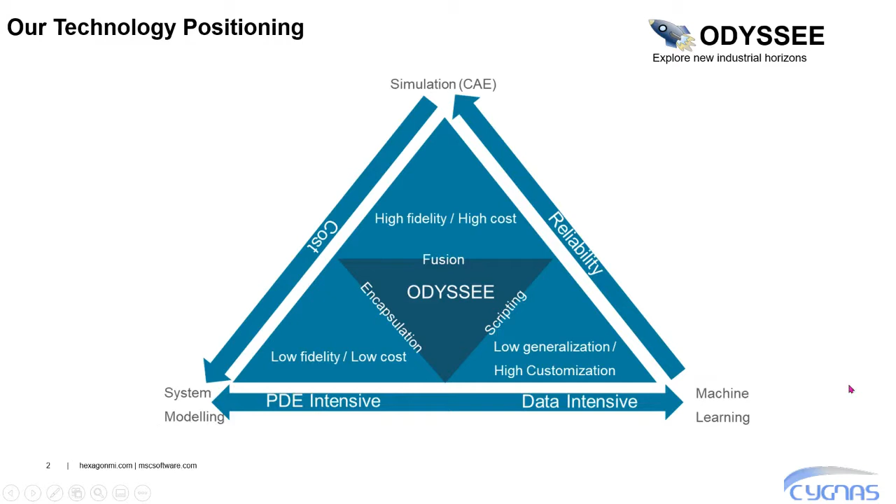Now, this is very much traditionally based on scripting, and it has small generalization, and scripting means customization. But what we want to do with ODYSSEE is to somehow simplify this aspect, that you don't need so much scripting, Python, etc. But you can have an engineering tool which you can work with your data, with your simulation models, and of course you can encapsulate everything you do in your system model. So via these techniques, we will encapsulate simulation models in system models.

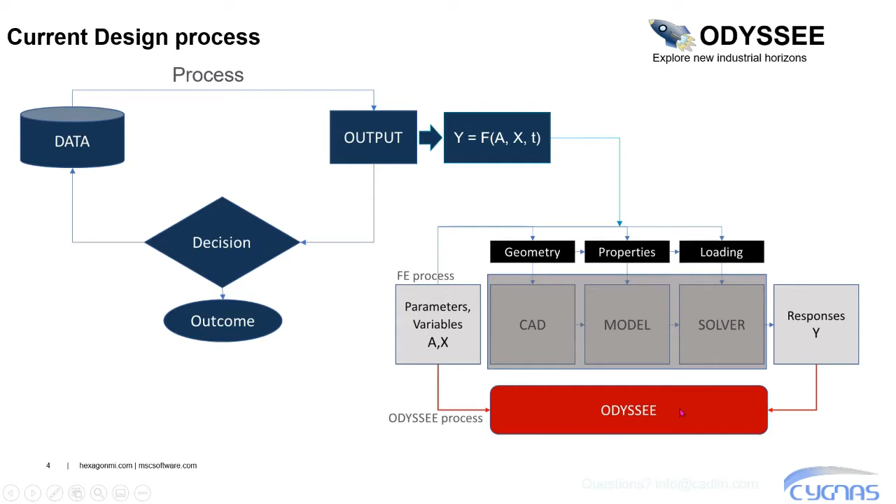So what we will do, we will try to relate directly the parameters, variables, unknowns of a system to the output of that system and use learning here. This ODYSSEE part uses various learning techniques instead of solving the equation. Now, once we do this, we can, of course, accelerate everything. Anything which is repetitive, anything which needs to be redone a few times, like parametric studies, or even more like optimization, where you have to cycle around the same problem, you change the parameters, or anything which has to do with an exogenous set of parameters, like boundary conditions, like stochastic analysis, like uncertainties, etc. Well, they will be extremely benefiting from this replacement of this part by a black box.

Now, this means also that we have to construct this black box at the beginning of the analysis, but the cost of it is low. So if I want to compare it to a direct usage of the solver, well, all surrogate methods use an initial set of runs to somehow create a surrogate model, and then they go down. Then their cost is much less. So this is also true with what ODYSSEE does.

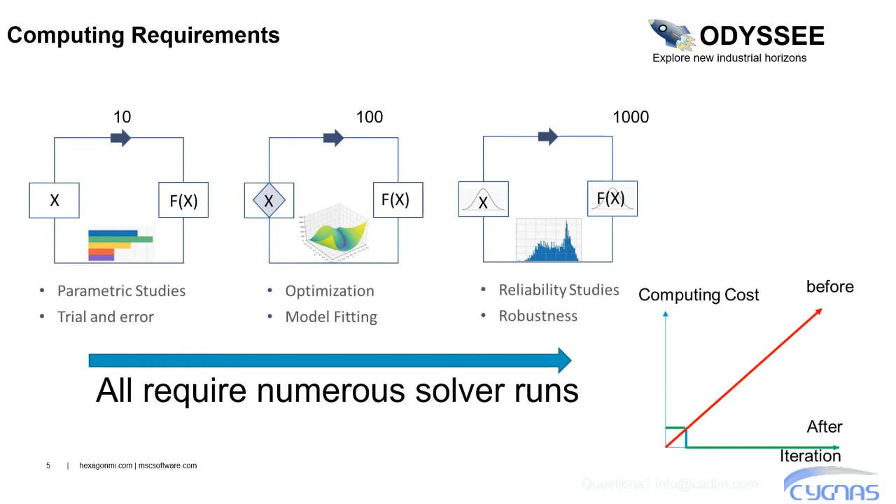So in a sense, we are using surrogate models, but not the same type of surrogate models you were used to, like response surface models, polynomial based, or any other type of response surface, but we are using a technique which is called reduced order modeling, which I don't know how much time we have,

but you've got 5 more minutes. 5 more minutes. Yeah. That means I don't have the time to explain to you how it works. Just take my word for it. It works. But I will show you one slide on that.

Now, this also brings us very close to the topic of digital twins. Why? It's no more a fancy word. It's actually a process. It means that instead of doing simulation, then manufacturing, and then service in real life, doing it in a separate process, we just consider that all this is one single process, and of course the flow of information must

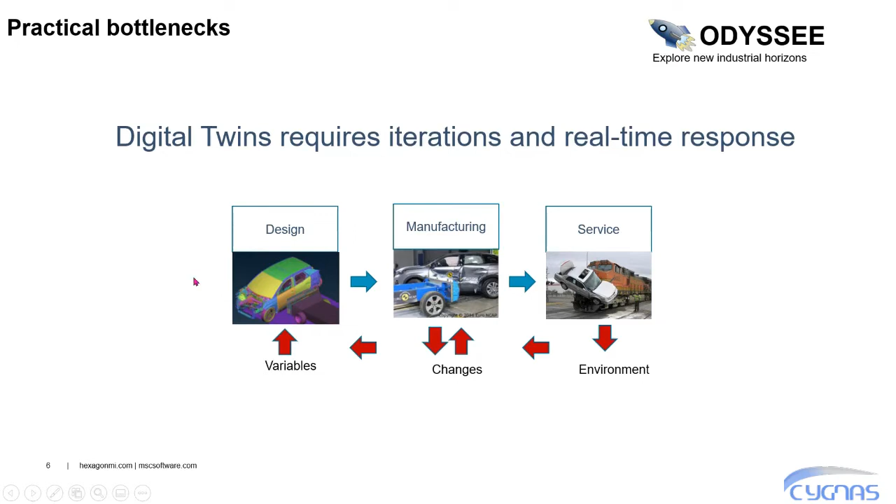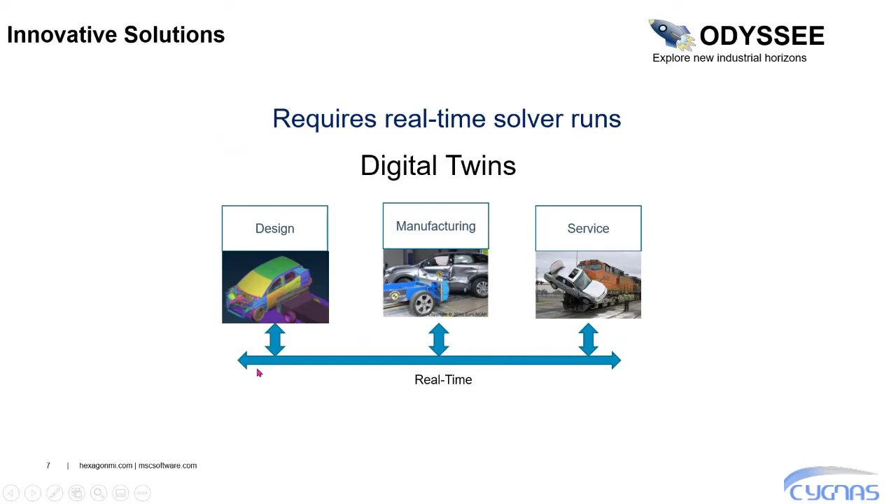be permanent. This can be done if this design part, which is the bottleneck, can be accelerated and transformed into a real-time solution like the one I have here. So everybody can now exchange information. The moment you have a question here, immediately you get an answer out. So this is thanks to this reduced order modeling and the technique it actually employs.

Now, just one slide if I have time, Sarah. So don't shout at me if I... No, you have time. Don't worry. Okay. I will have to leave a little bit earlier. So I try to give some answers before they're even asked.

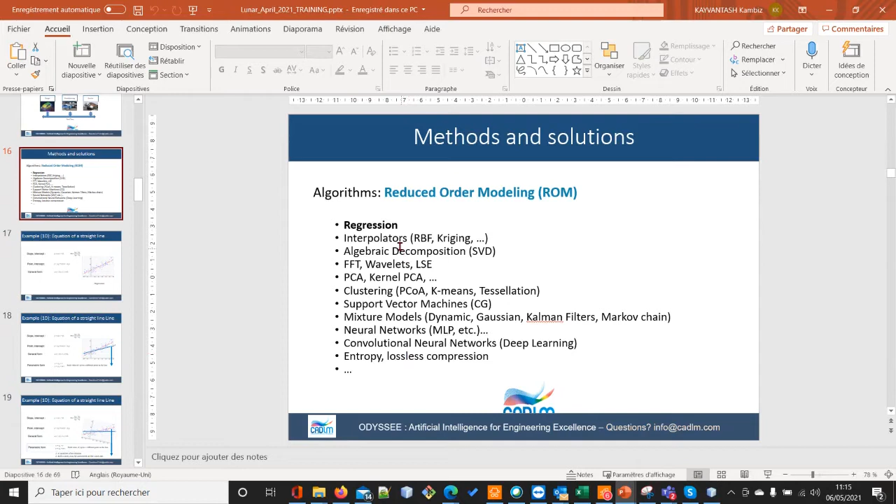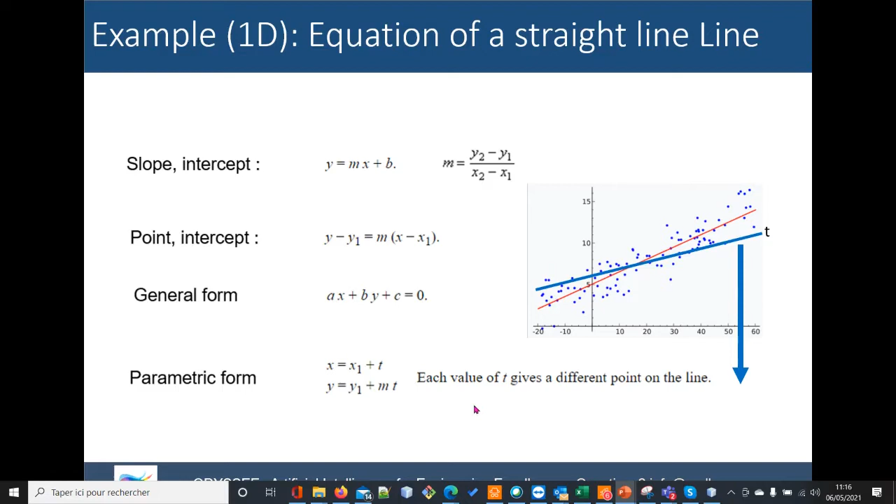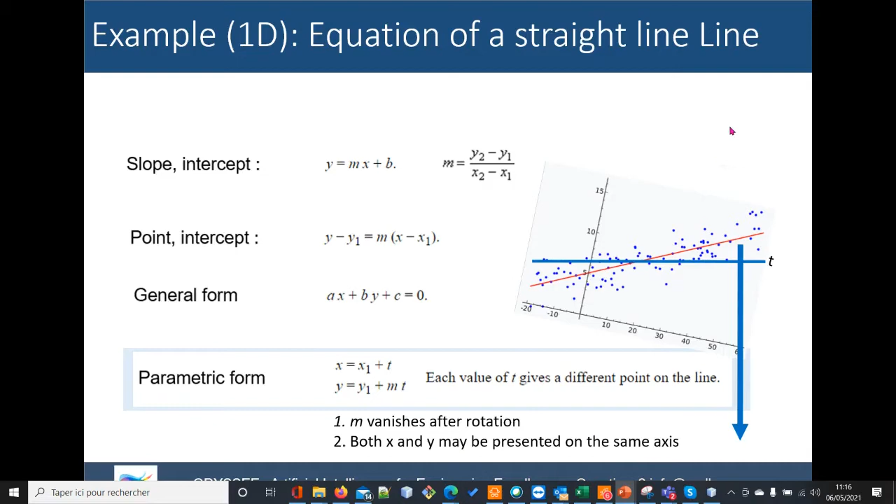Now this is based on a parametric form of the system. We extract that. We do transformations. These are done by eigenvalue computations and not by interpolations. But those are maths. Yeah, those are probably not relevant for you. It's just a projection.

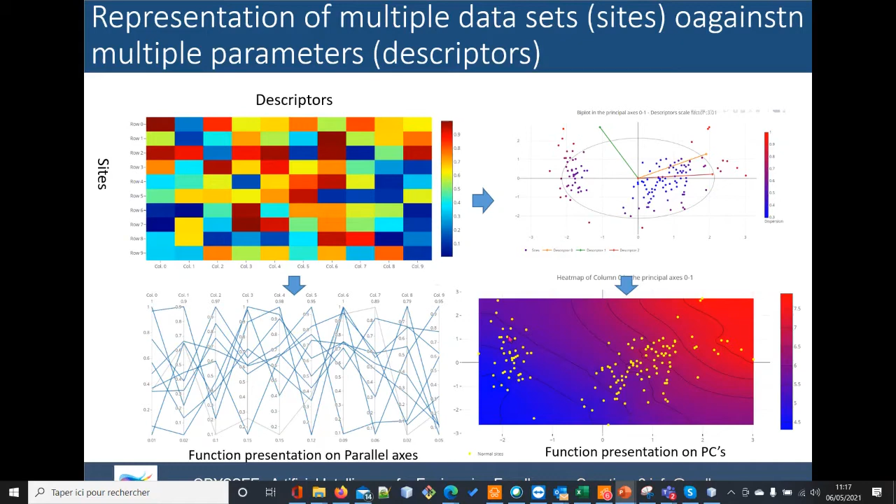Instead of using all the available information, you can project them on a wall and use the information like we do in PCA, principal component analysis. You can assess actually the behavior of the system by looking into maps like this. These are heat maps, and every point actually is a point which we had here. Every blue point can be projected into a heat map, and then we exploit this.

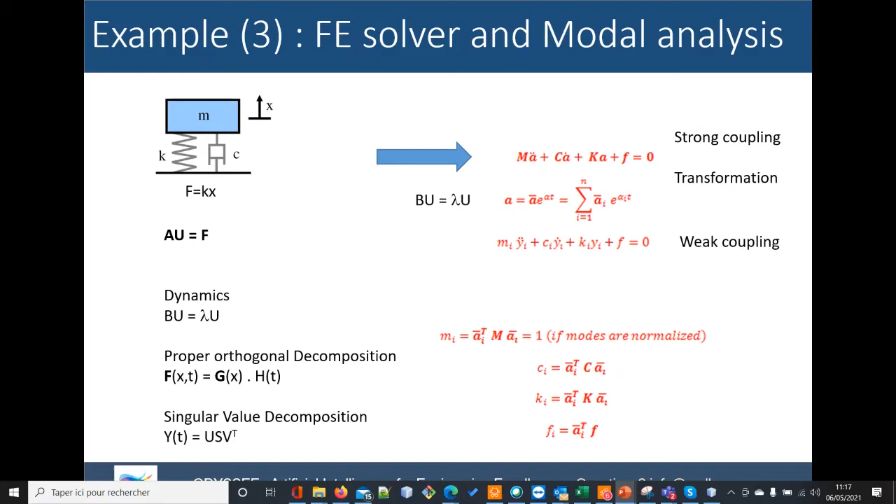Just a final word, you have seen this kind of solution in modal analysis and some relevant solutions, so it's not completely unknown. It's maths, and well, it works. Just take our word for it.

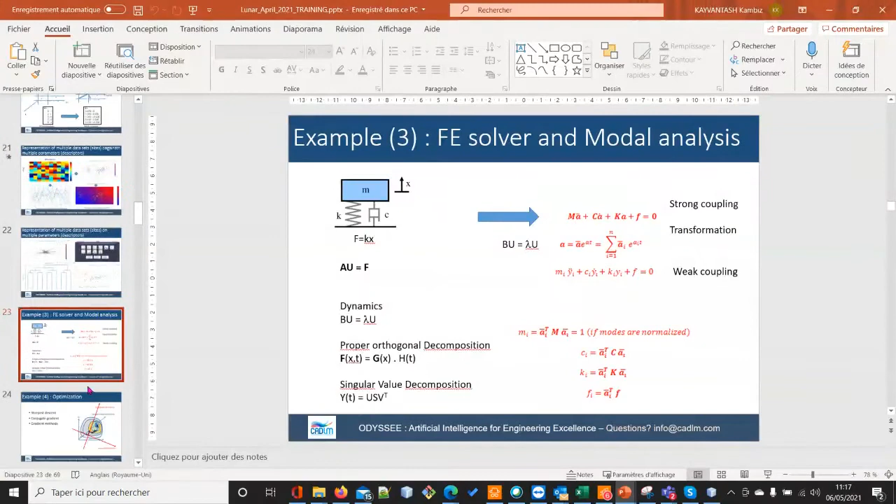Candice, you still have 2 minutes if you want to say any final thoughts or anything. I still have 2 minutes. Yeah. Okay. So if I have 2 minutes, then I will say this.

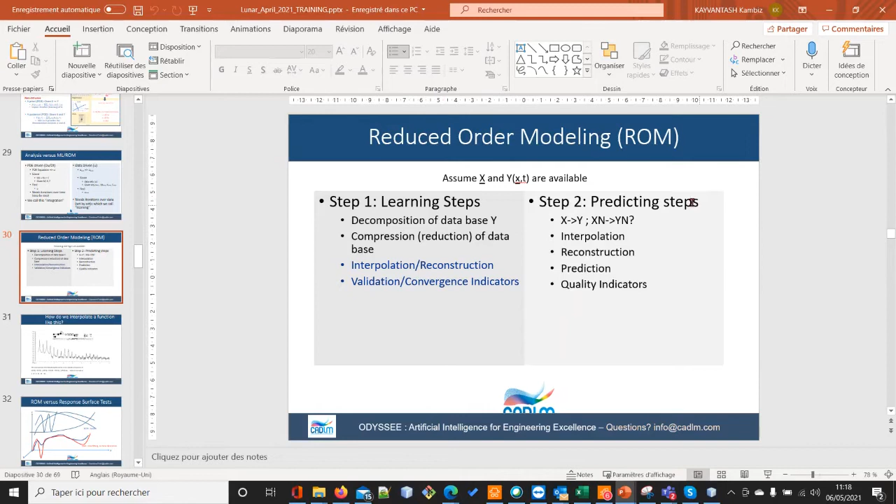Now, reduced order modeling is a combination of two processes. One of them is what we call learning. That means we use decomposition techniques in order to project the data, project the know-how we have on the system, onto a new set of coordinates, which is much simpler. As you saw in my previous picture, I was projecting all the data of the system onto a 2D plane, and we do the analysis in that 2D plane. Once we are in that 2D plane, then we use classical prediction steps like interpolation, etc.

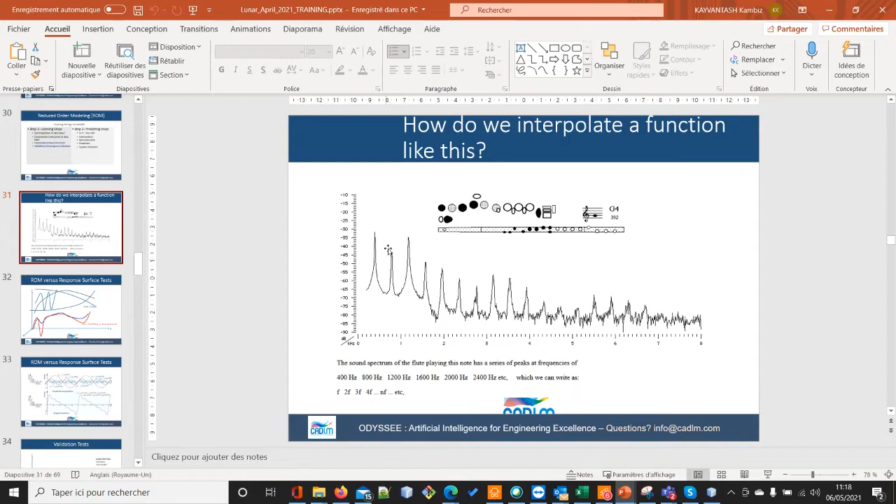This simply means, and by these two last pictures I can stop, let's assume I have a phenomenon which is very complex to analyze. Here I have an example of a flute. This is just the G4 note. So you see, even understanding how that varies in time is very complex, or in its variations. So if I wanted to have variations of this note, I have to be able to fit functions like this, and no polynomial type function or any other function is able to do that.

But the trick is known. The trick is in fast Fourier transform, for example, or Fourier transform. We know that instead of looking at the function in this complexity, it's enough to look at it in its frequency domain.

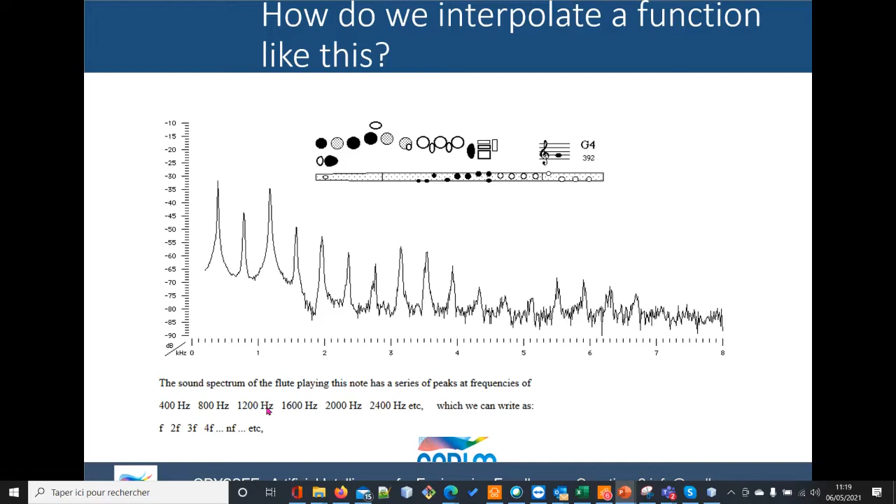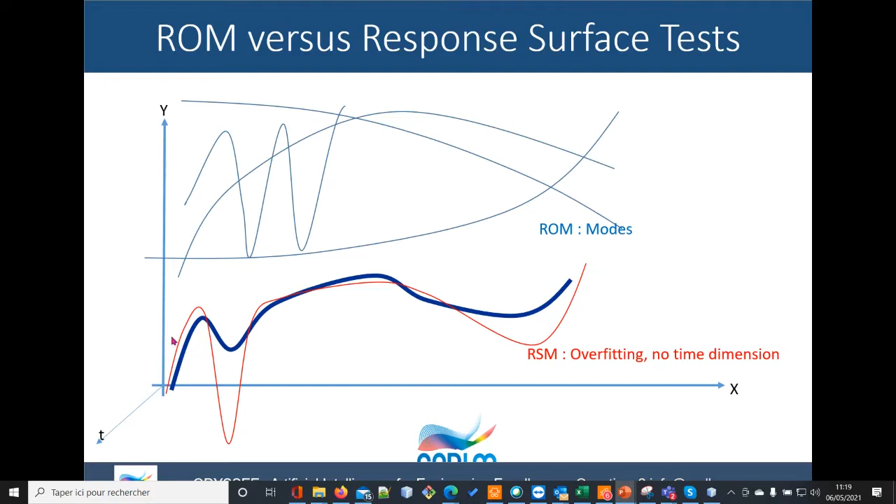Now, if we do that, same function which looks complicated here, for example, cannot be properly interpolated by existing response surface methods due to overfitting or due to the fact that time dimension cannot be properly integrated. If we decompose it and project it onto a new coordinate system, going from this thick blue representation of the phenomena into these thin blue representations of the same phenomena, you see I have modes here. Instead of talking about the full component, I talk about the modes of behavior. Then everything becomes simple.

Here, for example, a typical complex function, when I project it into that space, I have simple sine functions or cosine functions, and this is the trick with reduced order modeling. It recovers a complex system into simple forms of responses, and then we use combinations of those signals.

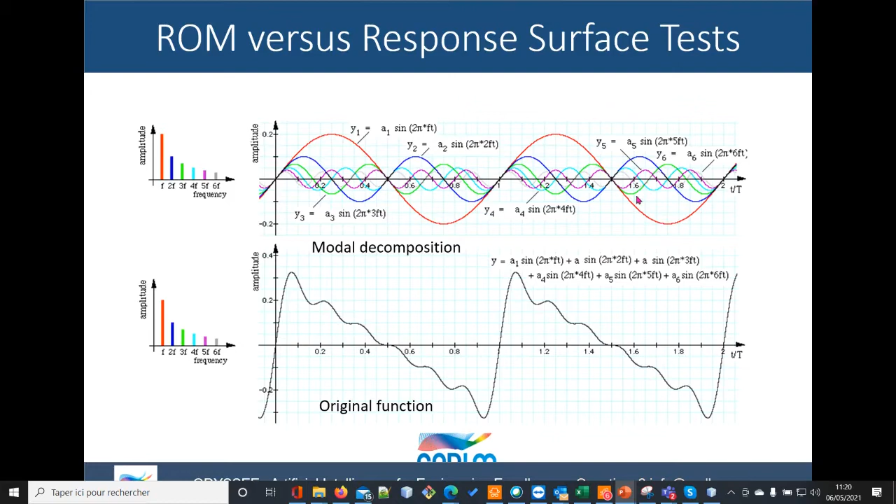So I will stop here and pass on the floor to Anil, who is, I think, somewhere. I have to find him, which window he is. I have lost him. Here, okay.

So please go on, Anil, I'll be listening to you. Yeah, thank you, Kambiz, for condensing all that into a quick 15 minutes. I am sweating now. Yeah, I know, it's hot.

I know you do have to go, so if anyone does have any questions, well, I'm here for another 20 minutes, I can stay for 20 minutes. Of course you can, please feel free to ask them now. You can always ask them at the end, and hopefully Anil will be able to help us there. If I'm not able, we will get back to them later, and we can consult with Kambiz and reply to them later. But if all is good, I'll pass it over to Anil to discuss some case studies.

Yeah, thank you, Sarah. Thank you, Kambiz, for such an introduction. We can't go into details because it's complicated mathematical expressions and things, but I will show you more application-wise where we are using this.

I've got 6 examples with different CAE tool sets, we have done these use cases. I will take you through them if time permits. I don't know, maybe I can cover at least 5 of them, but let's see how it goes.

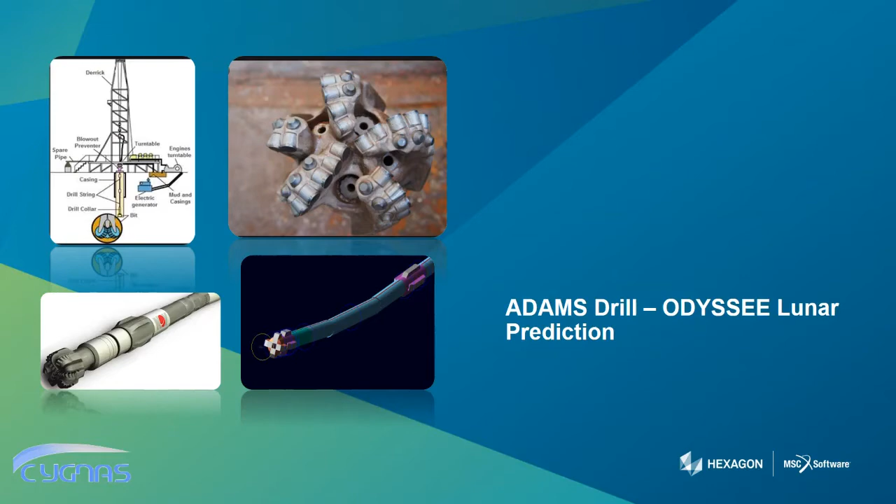So the first example I will take you through is Adams Drill. Basically, Adams Drill is a tool used for the oil and gas industry to represent and simulate the drilling process. This is basically the tool interface. Essentially, the tool is in an Excel format interface-wise, not very complicated, very easy to use.

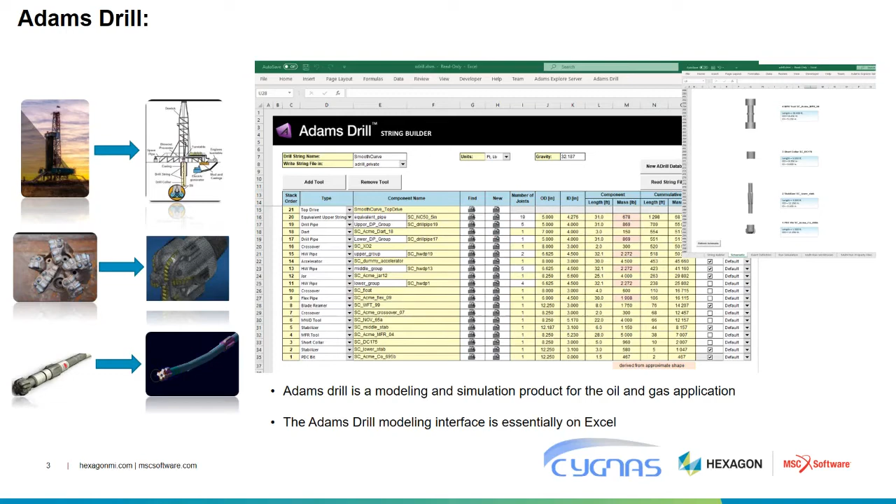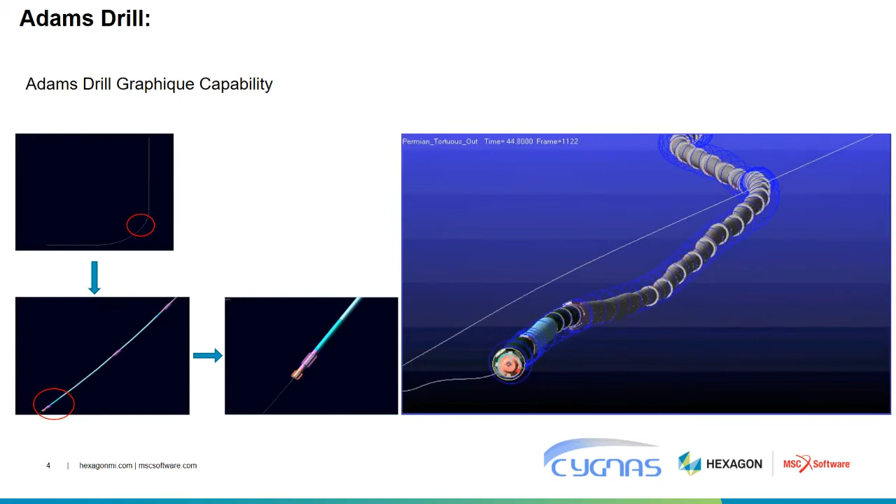You can decide the whole process, you can do it within this interface. We do have graphical and other animation capabilities with these tools as well. It's not like you just do all the pre-processing and make your model in Excel and can't visualize it. We do have visualizing and graphic capability as well in Adams Drill.

So the example I'm going to take you through is a drilling problem where we want to see what will be the bending moment, twisting moment, and axial load at 400 meter depth on a drilling exercise using Adams Drill code. For this study, as Kambiz explained, we need a set of input parameters representing your system.

For this example, I'm considering 3 of them: one is the RPM, another is the weight on the bit (WOB), and the rate of penetration. I'm considering these ranges: RPM from 110 to 130, weight from 45,000 to 55,000 pounds, and penetration from 115 to 135 feet per hour.

With this information, I have a tool, the reduced order model or machine learning tool we used for this study, called Lunar. Lunar can create your training data set or DOE set, as we call it. I'm using 10 sample points. We've got different algorithms implemented in Lunar to capture a very good DOE sample for your study. The whole results, predictions, and optimization depend on the samples you're selecting, so we have to select these CAE sample points wisely, and Lunar can help you with that as well.

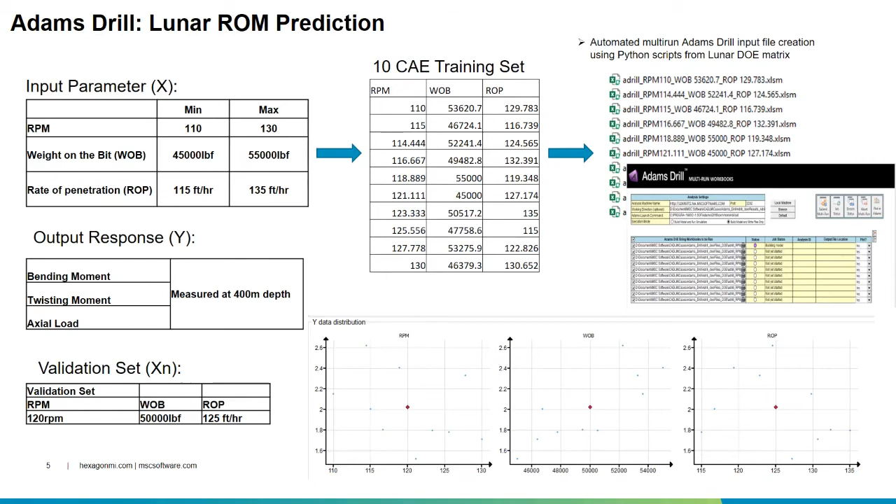So if you're not getting the quality of results you expect, you can increase the number of training data points around this area using the methods available within Lunar. There are different techniques available to improve your DOE set around the prediction area, and then you'll get much better results, improving the accuracy to a higher percentage.

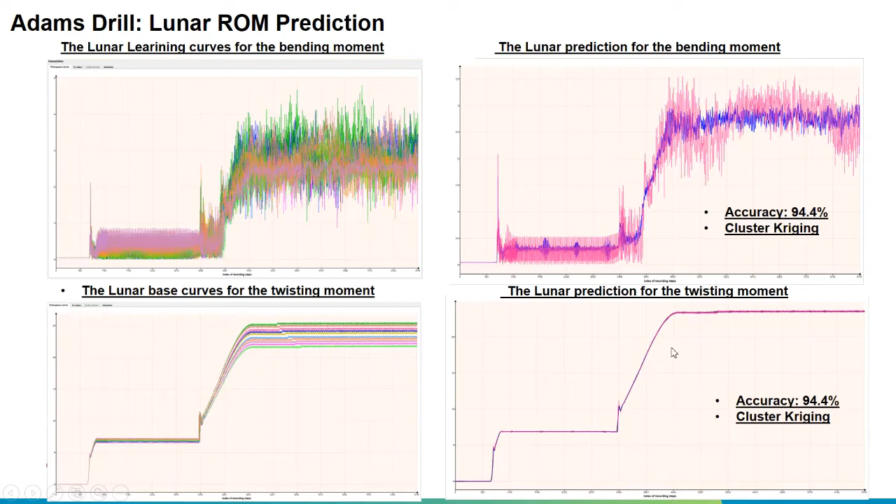You might be thinking Adams is always known for its quick multi-body based simulation. It's really quick, but if you want to do a sensitivity study of these parameters - say I want to fix the RPM at 1 and vary the other two parameters, changing 100 combinations within a range - it's a long process. Using these techniques, using the reduced order model capability of Lunar, you can do it in seconds rather than the hours it takes to run the whole scenario.

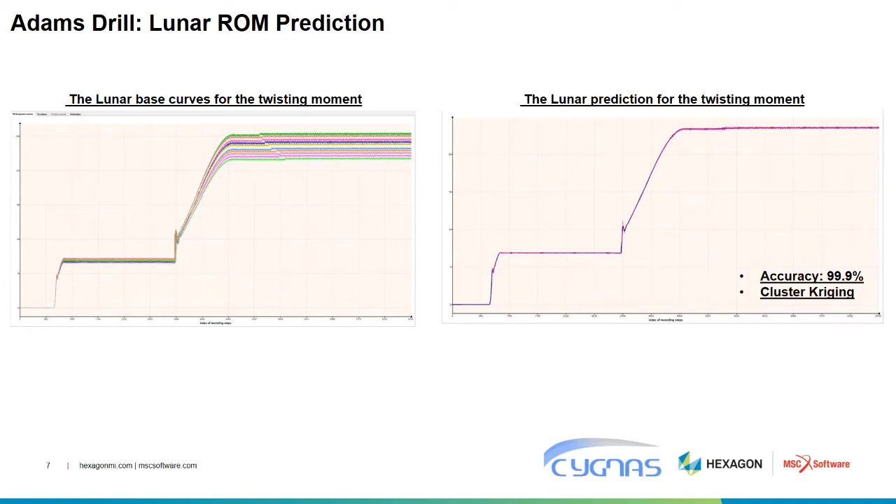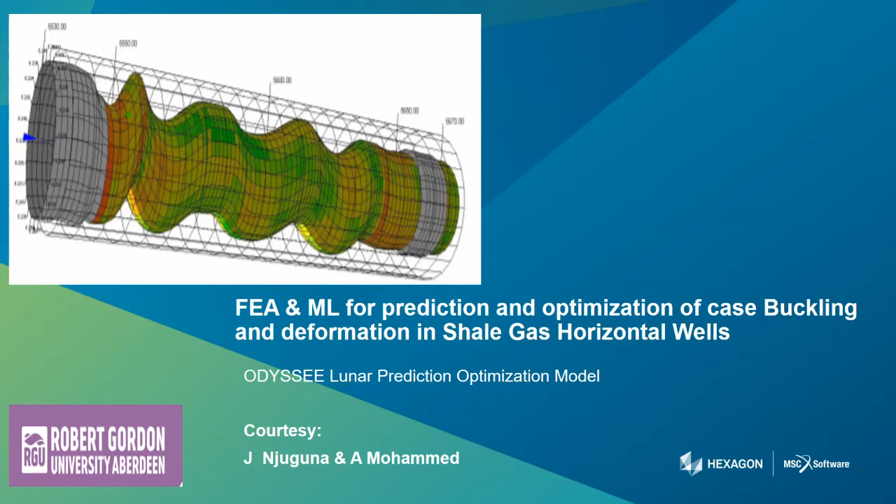So the next example is also an oil and gas example. This work was done by our educational partner, Robert Gordon University School of Engineering, under Professor James and team. In this example, we are using finite element capability and machine learning capability to optimize a design in a horizontal well - a horizontal pipe in a shale gas well to prevent localized buckling.

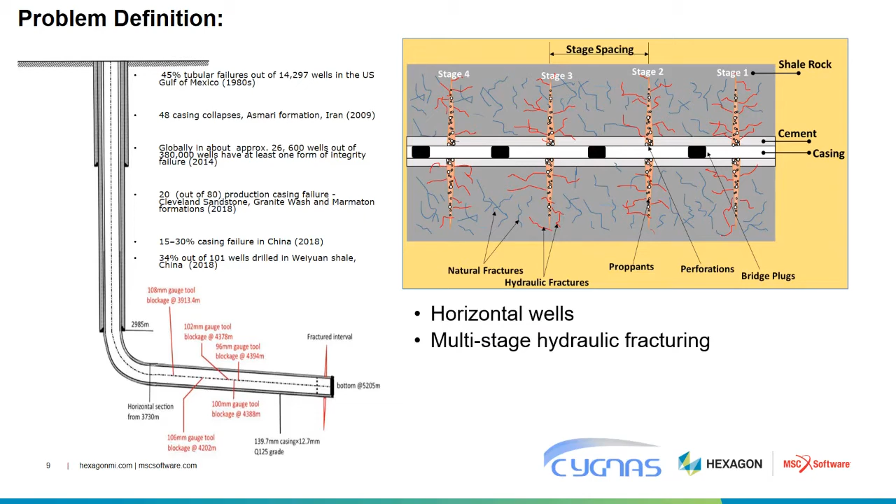These are the main contributing factors. Because of this hydraulic loading, we see a number of localized buckling cases due to conditions like a weak fracture plane or weak bedding plane, thermal loads, asymmetrical stress, and other conditions. This is a serious issue for the oil and gas industry because it costs them loads of money - in the range of 30 to 40 million US dollars per well. We can see from the statistics here how severe the problem is around the world.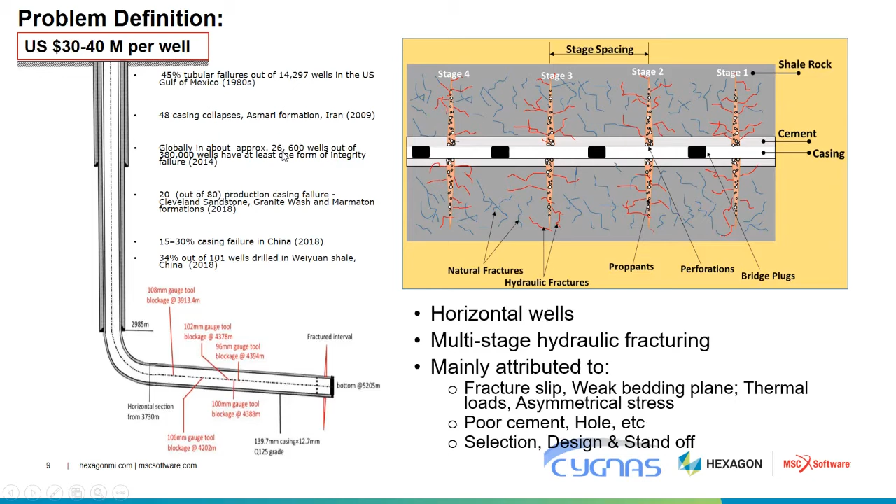So this is an example of the real life deformation in the pipe - you can see on the left hand side - and we try to simulate that using the ANSYS tool. You might be thinking this tool will only support MSC or Hexagon products - no, the tool is agnostic. It can support any CAE product or any testing data, not only CAE but experimental data too - we can use that data to do the reduced order modeling, machine learning, and prediction or optimization based on it.

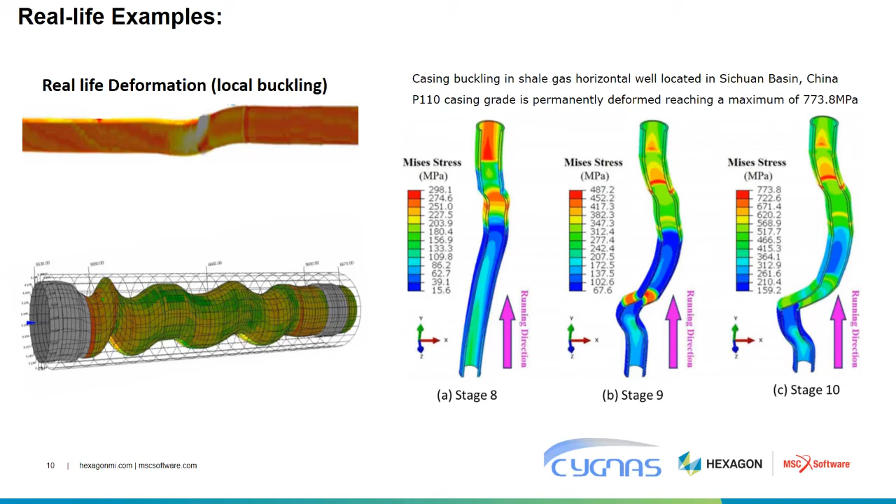So the right hand side simulation using ANSYS shows the peak stress at the buckled stage 10 is around 773 megapascals. It's really reaching above the limits, and it's getting buckled locally.

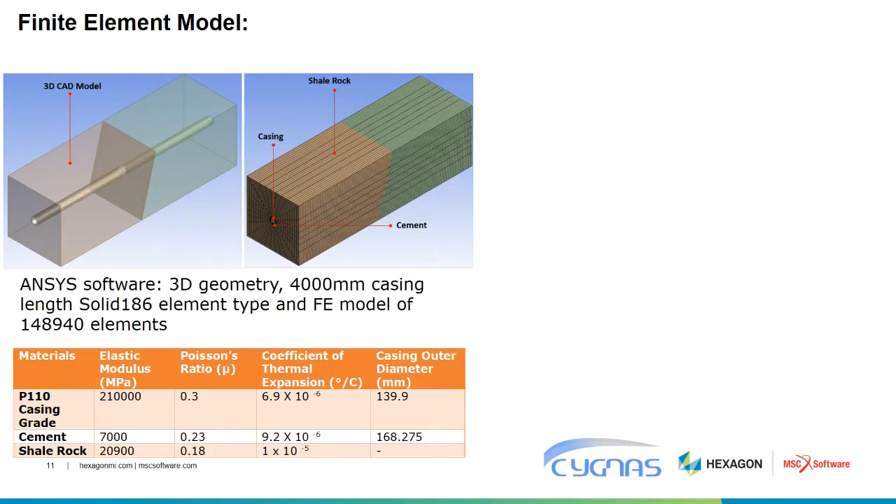The finite element model we used for this is using ANSYS. You can see the 3D geometry and the FE model on the right hand side. Basically we used a model with solid elements, around 149,000 elements for a 4 meters length of the well. And the material properties used for this study are shown below.

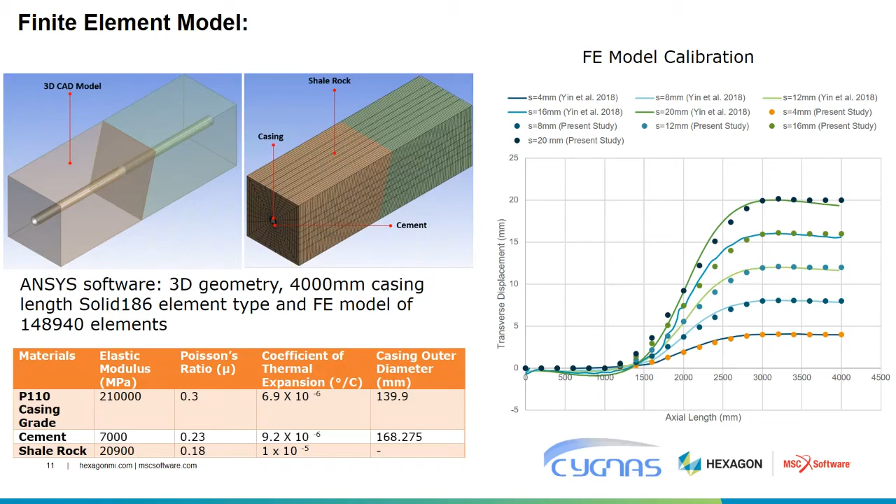This is the transverse displacement we measured, one of the characteristics we measured, the transverse displacement when it is getting buckled along the axial length of the pipe.

So the idea, as I mentioned earlier, is to learn from a minimum set of data using the CAE simulation capability, FEA simulation, and then predict or optimize the system to prevent the buckling. We want to modify the design in such a way that it won't buckle at all.

If you want to do this in a fully CAE environment, it will take thousands of runs. So instead of doing thousands of runs, we do runs in hundreds, learn from that, then use the optimization methodology implemented in Lunar to do the prediction.

But we have used the option of clustering. In this study, we are not considering the whole set of 517 for the prediction or optimization. We are just using a subset of that using clustering and doing the prediction.

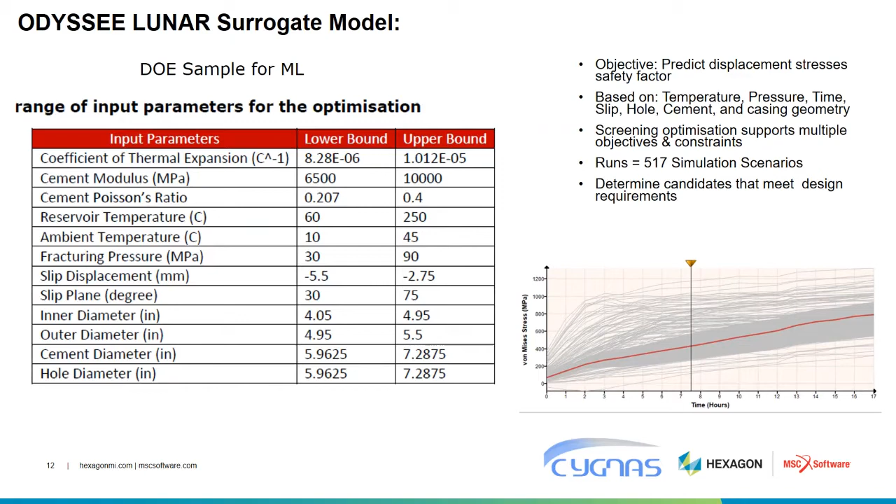So as you might have already seen, the methodology here: we got an input parameter set which describes your system in the finite element world or in a testing world, which could be mass, diameter, length, material properties, or anything like pressure, any loading condition, boundary condition, any data which describes the system. It goes into an input format into an X file, in a CSV format.

With that we will create the DOE set, the set to run the analysis. Then we get the output Y file responses, which we capture from the system. It could be force, displacement, stress or strain, or even deflection, deformation, you name it. Anything that you want to measure, acceleration, velocity, that will be your Y response.

That is fed into this ROM model or machine learning methods, and it learns from that, and then it can predict for a new set of variables which is not part of the study. This is a new variable, and if you want to run these things, it will take ages in a complicated problem.

You need higher HPC hardware requirements, as well as the manual labor to prepare and run these simulations.

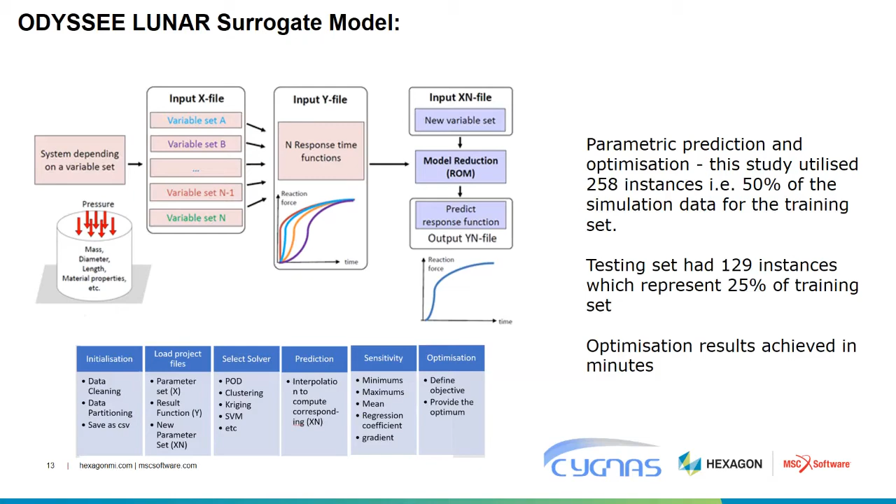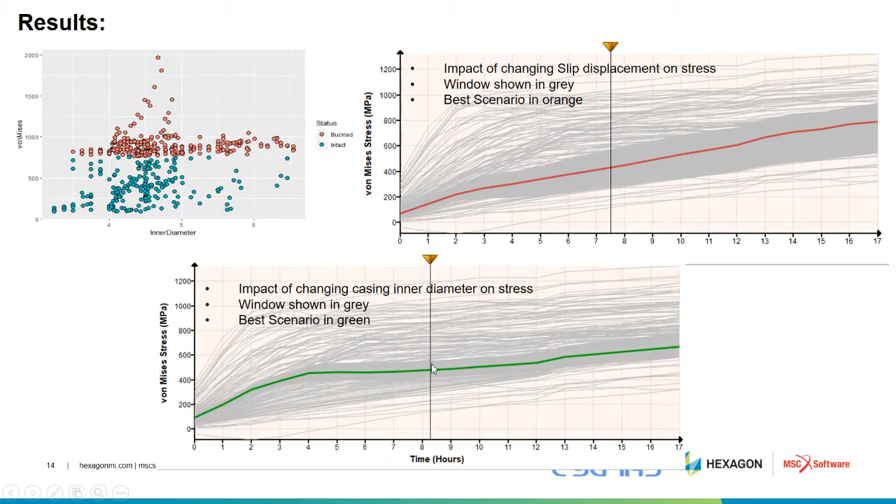Again, for change in the casing inner diameter, how the stresses will be varied. The study is shown in green. And we have used the optimization. There is an optimization capability tool within Lunar. We use a separate solver called Nova for this, which is embedded along with Lunar.

As you know, we have classic DOE optimization techniques, as Campbell mentioned, response surface method and all, where if you are using those methods to optimize, you have to run hundreds of CAE runs to get better results. But here we are using a really minimum set with the reduced order modeling capability, hundreds or less than hundreds, for this kind of study. In the next example, you can see I'm just using 10 or 20 sample points rather than hundreds.

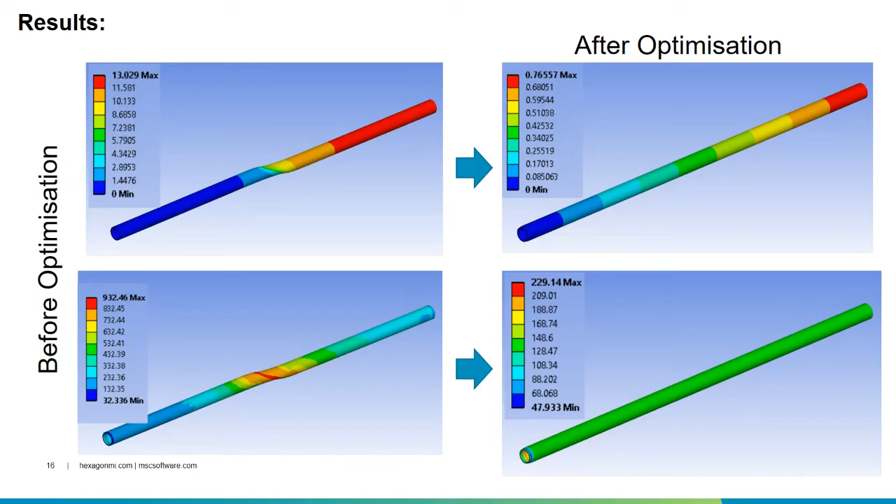Once you do the optimization, if you click the optimized curve, it will give you the corresponding input parameters describing that curve. Then you can rerun your analysis and see whether your new design candidate is safe enough, not failing at all. From the picture on the left-hand side, two of them are failing at those locations, and after optimization you can see how safe your design is. The optimization happens in minutes rather than hours or days with real-time CAE or the old classical DOE techniques.

So with this work, we showcased that we can establish the relationship between multiple parameters, and we can optimize for a better design with a better safety factor. We have reduced the von Mises stress in the pipe by 87%, the total deformation by 89%, and the factor of safety bumped up from 0.8 to 3.3.

These kinds of tools can enhance your engineering decision making and capability in real time. If you got a field issue with new input parameters, you don't have to wait and run the whole CAE process again. You just come here, give those parameters and run the reduced order modeling prediction. You get the results in seconds. The data is already there. Leverage that data, do the prediction, and know the system behavior and how the design will change in seconds.

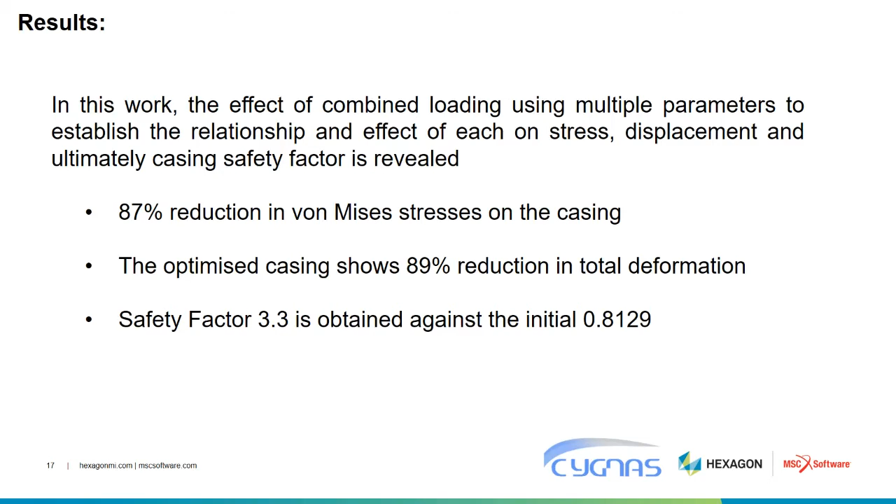I'll just let you know you've got 10 minutes left. No problem. Thank you.

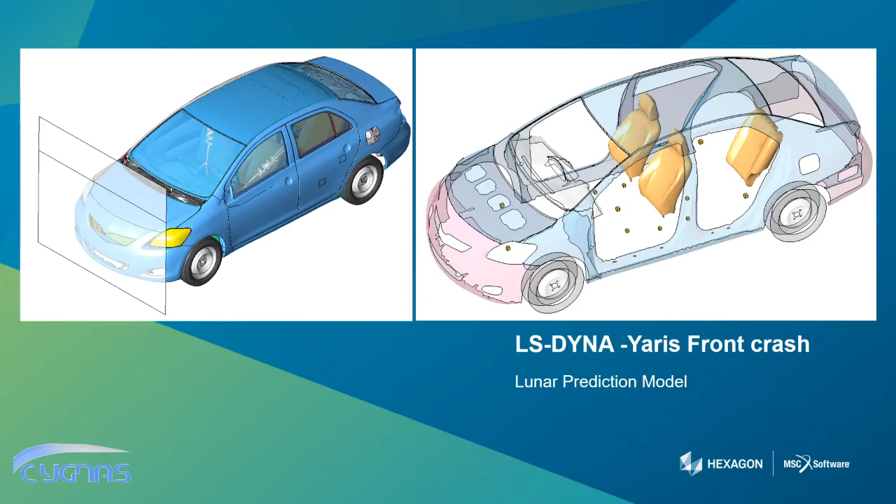So the next use case is an automotive use case. This is a frontal crash using LS-DYNA, again a different tool, not an MSC product. So it doesn't matter which tool you use. You can use these capabilities for any CAE or testing capability. In this one, we are doing a full frontal crash.

As you can see on the left-hand side, we use 3 parameters to describe the system: inner rail thickness in green, floor support structure thickness in yellow, and the velocity of the impact. We are changing that as well, and we are measuring as output response the driver seat acceleration, rigid wall force, and gravity at the COG location.

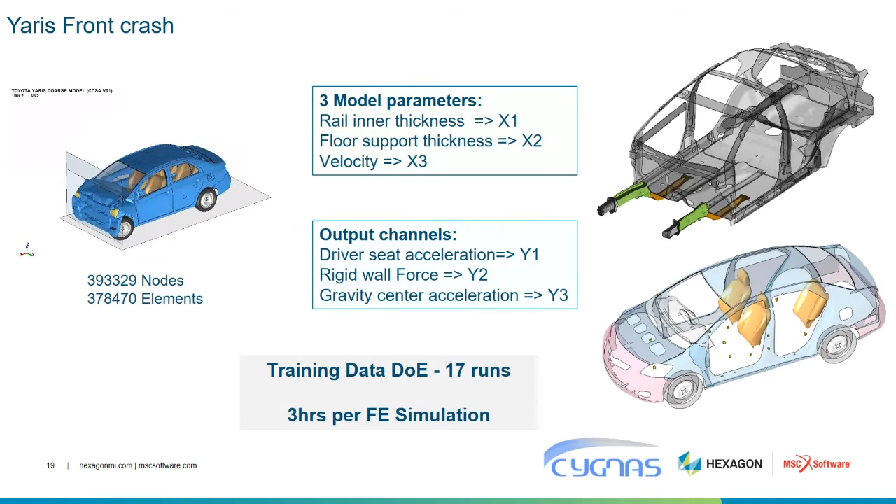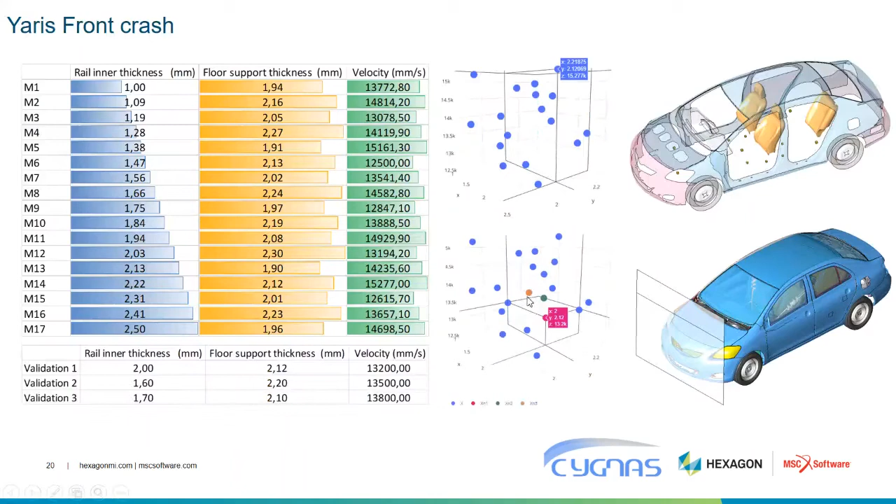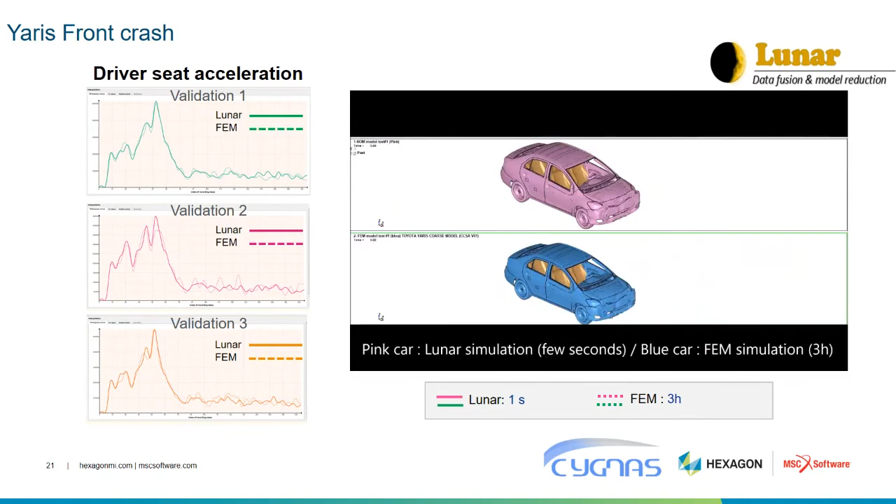So consider spending 3 hours in a heavy HPC environment versus running it in seconds using Lunar. You can do lots of parametric study and optimization of the system using a very minimum number of CAE runs.

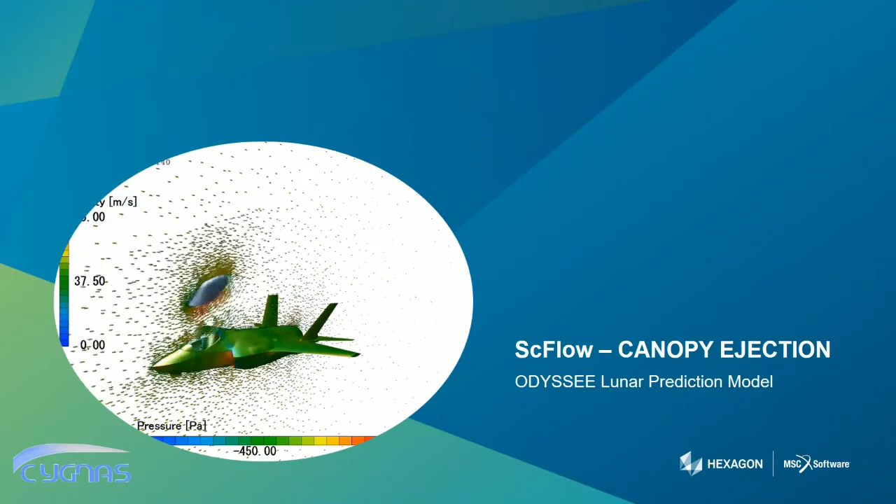So this is another CFD example. As you know, CFD simulations are pretty expensive in terms of HPC as well as processing time. Simulation takes lots of time. If you have a heavy model, like a full car aerodynamic study, it will take 4 to 5 days to complete the CFD analysis on a 180 or 200 core HPC machine.

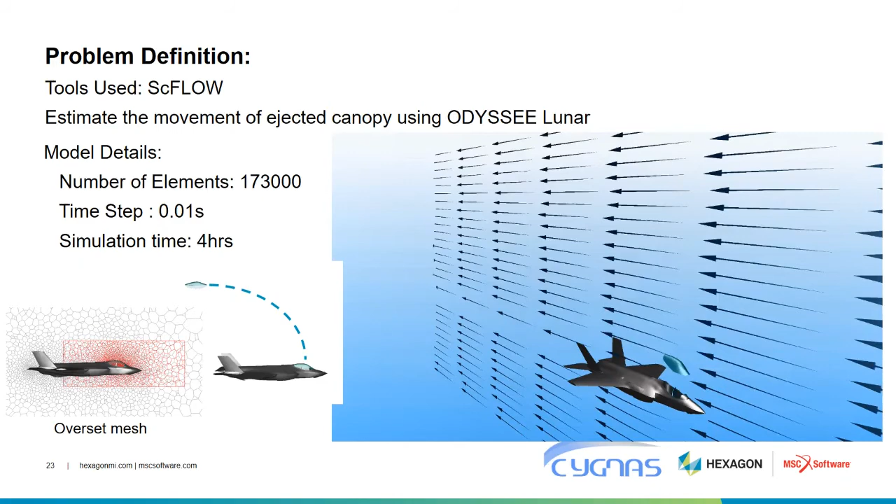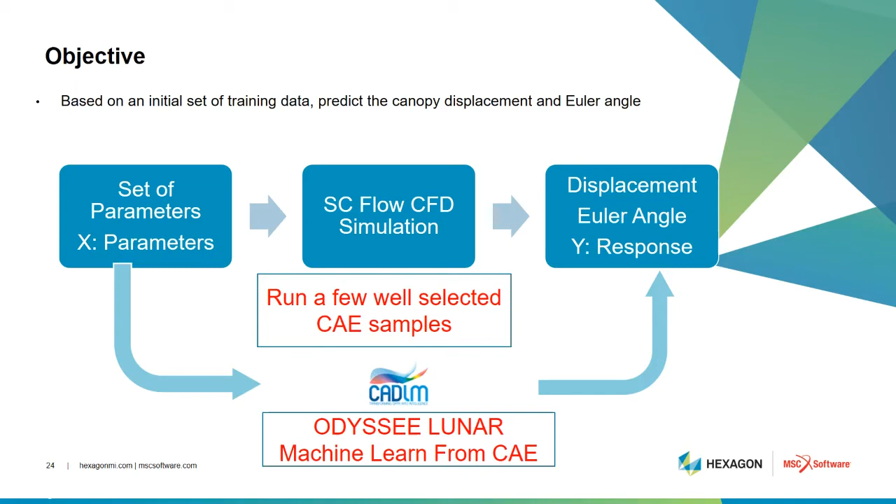So we are using the reduced order machine learning capability to predict the trajectory of the canopy after the ejection using one of our CFD tools called ScFLOW. The total system has 173,000 elements, and each run takes around 4 hours to complete on an HPC machine with 36 CPUs. So what we want to do is learn from an initial, well-selected CAE sample data, and predict the position of the canopy after the ejection in terms of displacement and Euler angle.

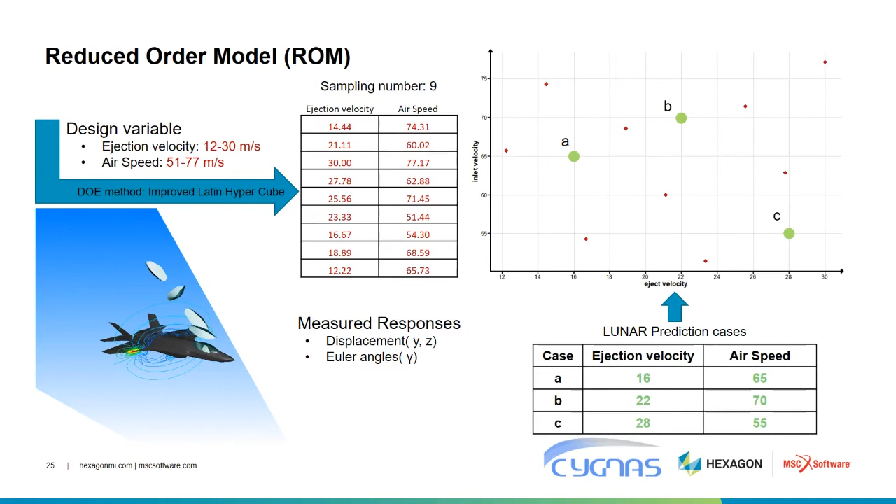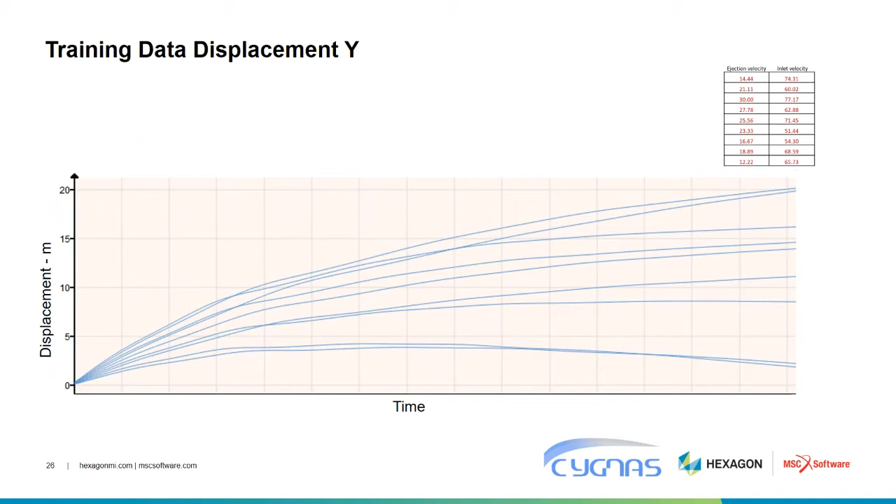For this study, consider 2 input variables: ejection velocity ranging from 12 to 30 meters per second, and airspeed 51 to 77 meters per second. On the right-hand side, you can see the DOE matrix we have used, and 3 predictions we are doing at 3 points, shown in green on the graph. This is the learning data set we have used for the Y displacement. Each curve represents individual CAE runs based on the 9 cases in the top table. And this is the simulation: after the ejection, how the canopy is moving.

So for the Y displacement results, the Lunar prediction is the thick curve, and the dotted curve is the validation with those predicted new variables using ScFLOW. This is an additional run, not the same run as in the CAE training data, and we are validating against that, and we are getting really good prediction.

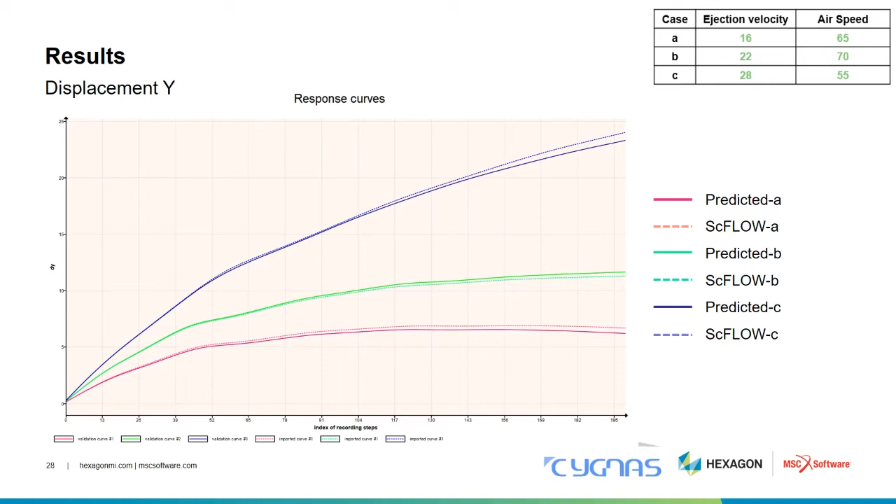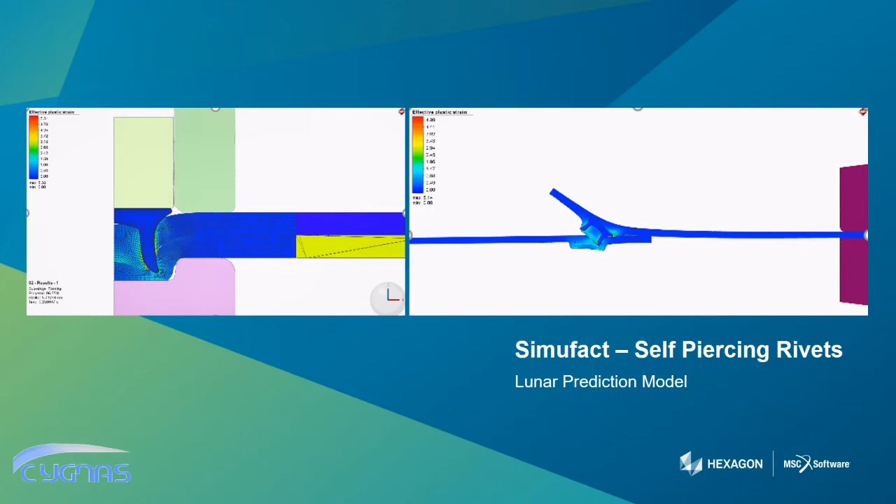We are simulating a self-piercing rivet case and doing the joint strength test using the Simufact Welding tool. This is typically an example from an aerospace or automotive environment. The automotive industry is now moving to lightweight BIW structures. They want to use aluminum as a replacement for steel. As you know, aluminum weldability is very poor, so they use these riveting technologies to bond the different panels. And they have to prove the strength of these bonds using either physical testing or simulation.

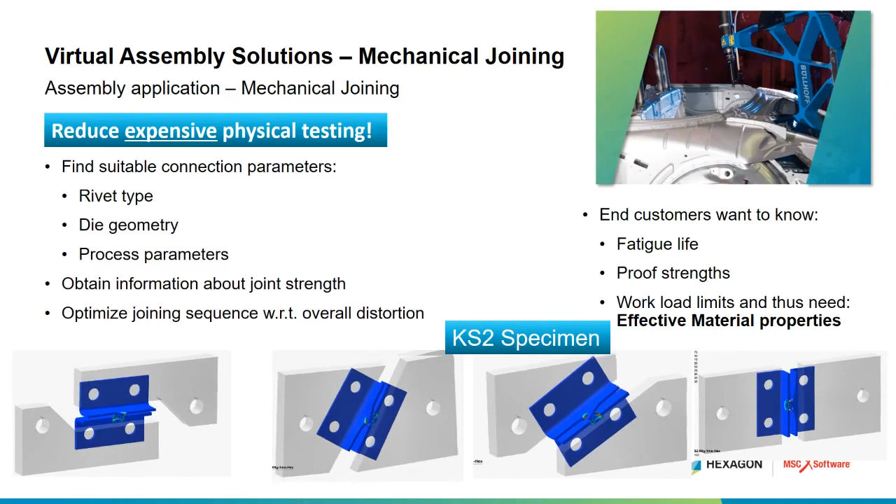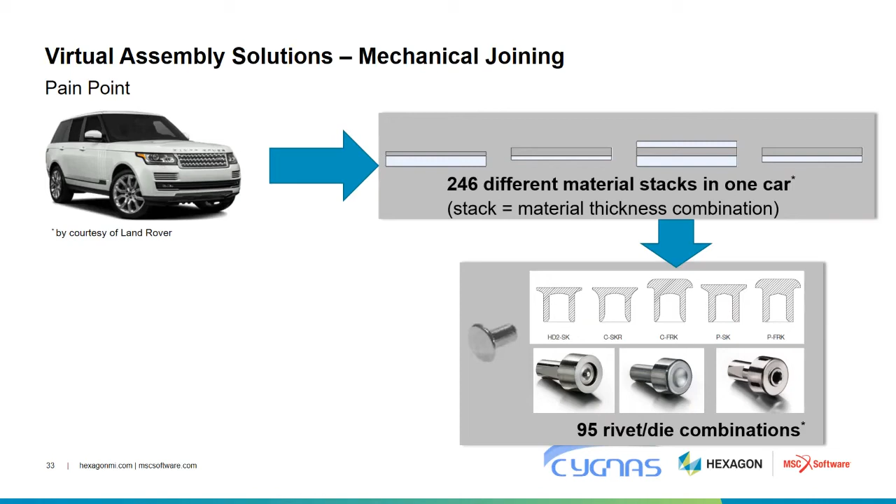In a typical car, like a Range Rover, there are a couple hundred different material stack combinations and around 100 rivet die combinations. Testing these combinations runs into around 23,000 combinations, which you have to test one by one. But OEMs don't do all 23,000 physical tests or simulations. They pre-select a set from these 23,000, around 200, and do those 200 sets of physical testing or CAE simulation.

It's a huge task for them in terms of labor intensive process and money involved and time involved. It's a big process for them to do it.

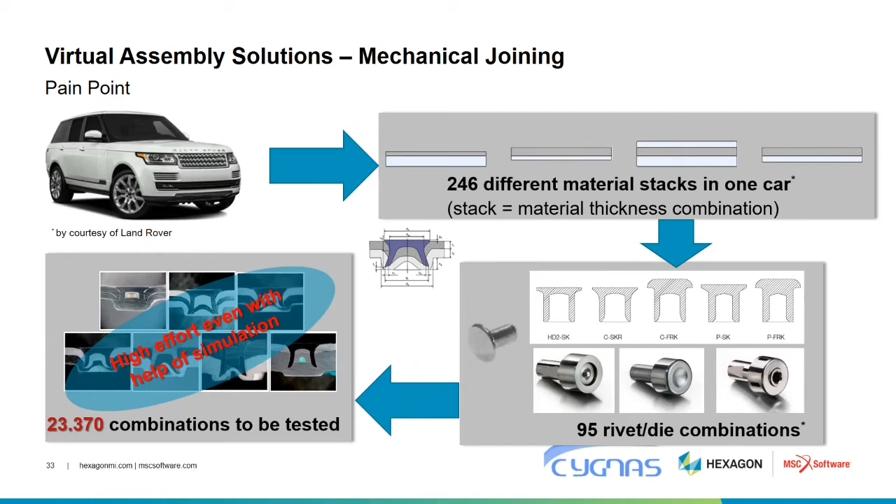And in this study, what we are doing... We just have 2 minutes left, just because we have a few questions to answer at the end. No problem, I'll finish. Yeah, you still have 2 minutes, so if you could just begin to wrap up, that'd be good. Yeah, I'll finish with this example, I think.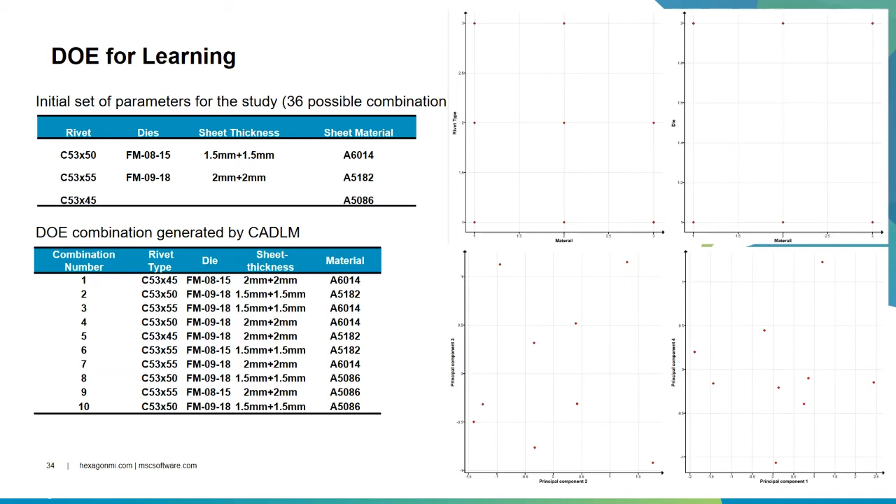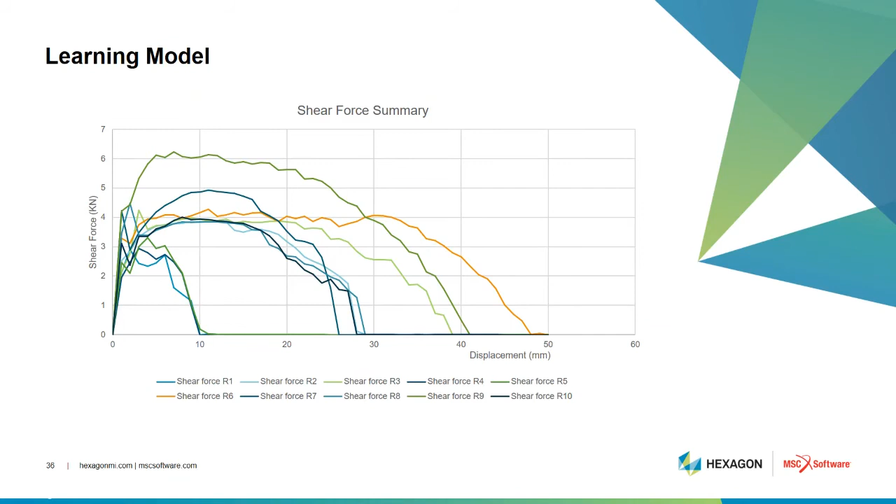And this is the actual simulation for the riveting case, you can see, and the axial loading as well. What we measure is the shear force versus displacement of the joint. These are the 10 use cases, the CAE sample data we are using for the study.

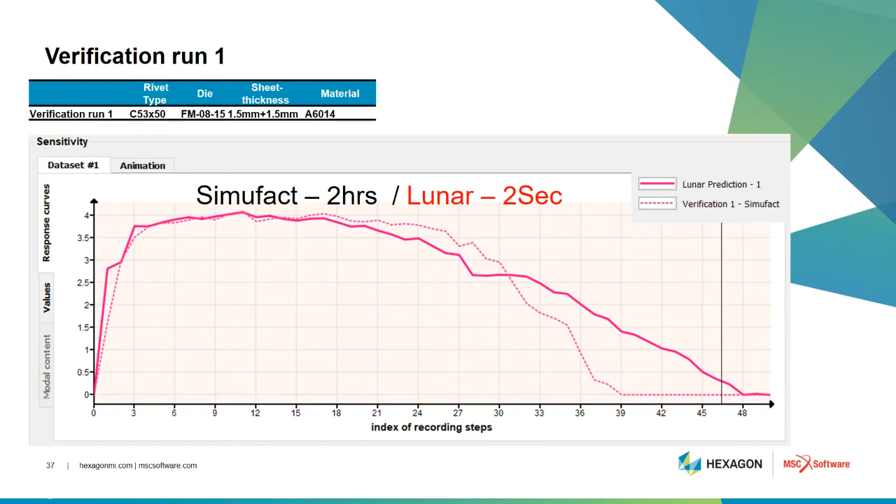Anil, I think it would be very useful for our guests to actually see. You remember we talked about the visual simulation as well. So I think just go over some of the examples. Maybe don't go in detail, but just an introduction of what was done, and just go over the rest of them. Thank you. I think this is the last one.

Maybe I can do it in a few minutes. So the next one is another CFD example. This case is very valid at the pandemic time. In this example, we are using this CFD capability to measure the quality of air inside a restaurant, and what is the velocity profile of this air movement inside a restaurant. And with that, you can see where the good quality air is, where the circulation is really good, and where the quality of air is bad.

We are not using any text data as such. We are using images to do this study. It's not an image recognition capability. We do have image recognition capability, but we are using heat map techniques to do that, and we are learning from that and converting that using entropy, or whatever you call those techniques.

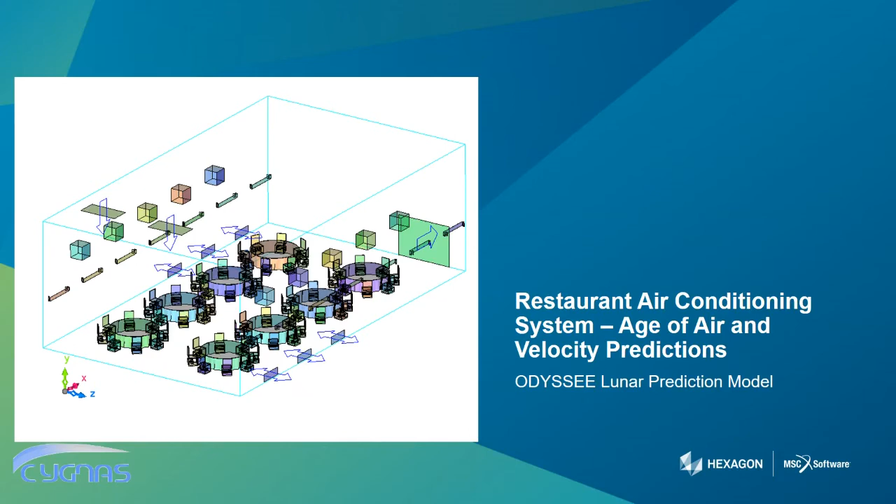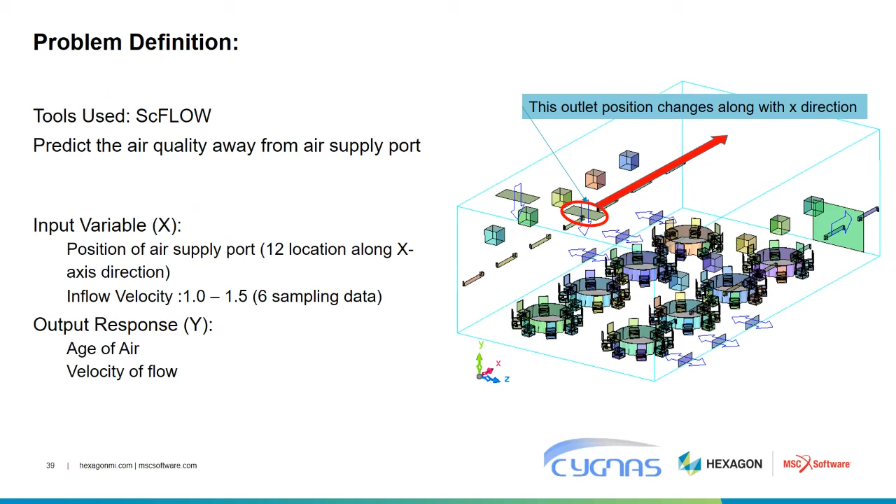So the tool used is scFLOW, and for this study, in order to predict the air quality, we got 12 sample points. These are taken at different positions of the air supply port at different locations, like along the length. You can see 12 sample points on the right hand side, and we are taking a cross section to predict the velocity, how the air is flowing inside the restaurant. So we use 12 sample points for the air quality and 6 samples for the velocity prediction.

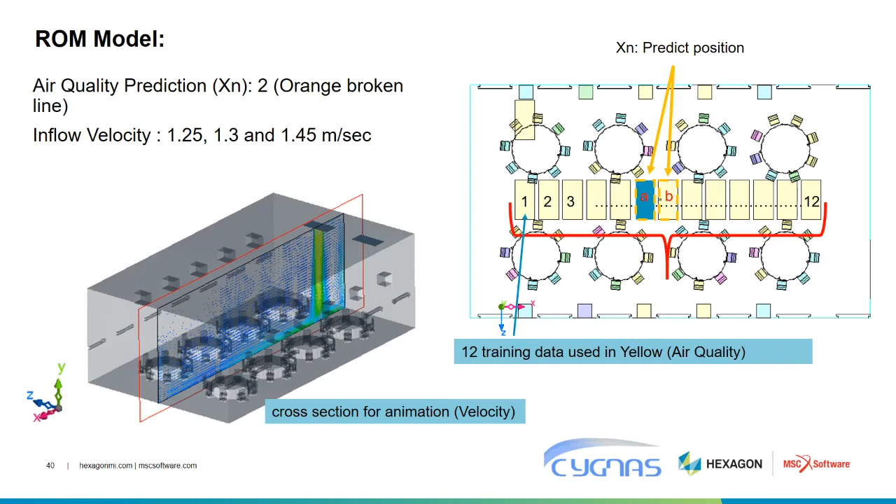So you can see, these are the predictions we are doing on the air quality. We are taking 2 points, A and B. A is a point already in the CAE training data, and B is a new point which is not in the CAE training data. And you can see the cross section where we are measuring the velocity profile.

So as in the previous example cases I explained, the normal procedure is you run your normal CAE activity, generate your data, then convert that into a Lunar readable format, that is CSV format, text format, feed that and do the reduced order modeling technique. Here we are actually converting your solver field files, like the ASCII files or the plot files, into an H5 format, neutral HDF5 format, and you are feeding that format into Lunar.

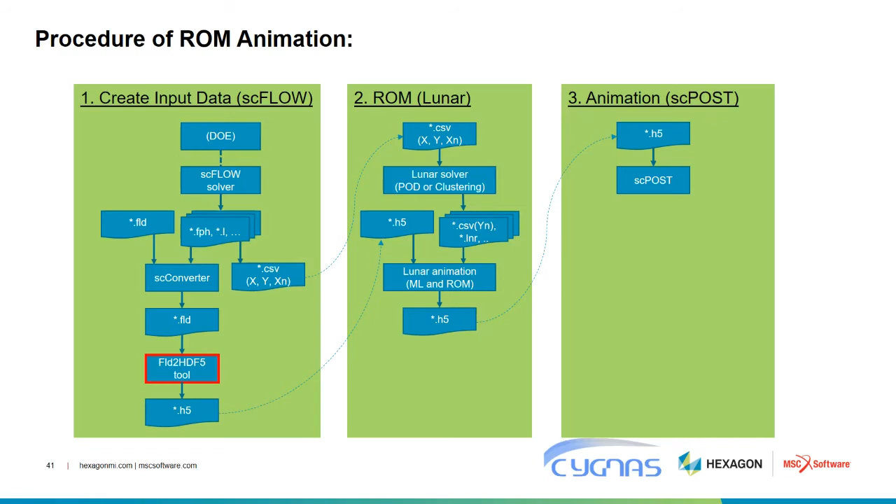And Lunar learns from that, using the heat map option, or measuring the color densities or quantities using RGB, like monitoring red, green, and blue concentrations, and does the prediction based on that. So Lunar learns from H5, it does the prediction in H5 again, and you can read that H5 in your preferred post processor and do the post processing. You can actually visualize the Lunar prediction in your post processor. So this is an example for the air quality prediction at the locations A and B.

As I told, A is already a point in this training data, and you can see the CAE stream simulation on the left hand side and the Lunar prediction on the right hand side. Both are identical. There is no difference. And prediction B, which is not there in the CAE training data, is a new prediction point. You can see how good the prediction we get. We get a good prediction for that as well.

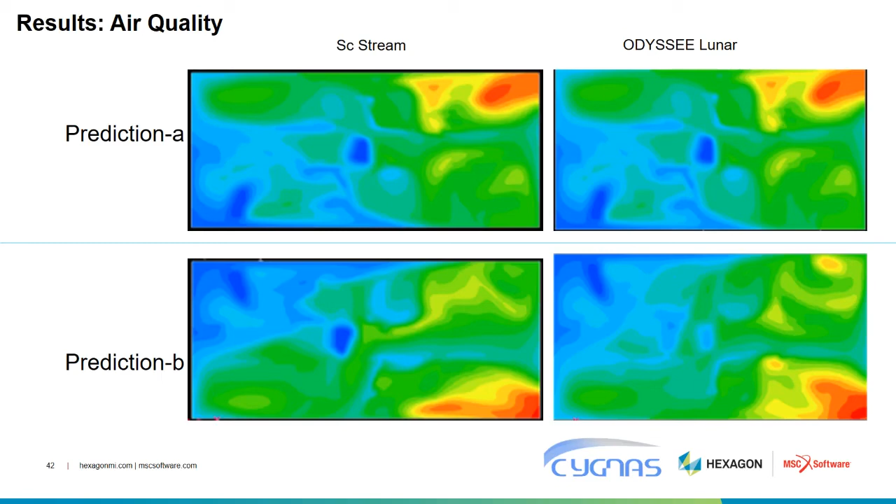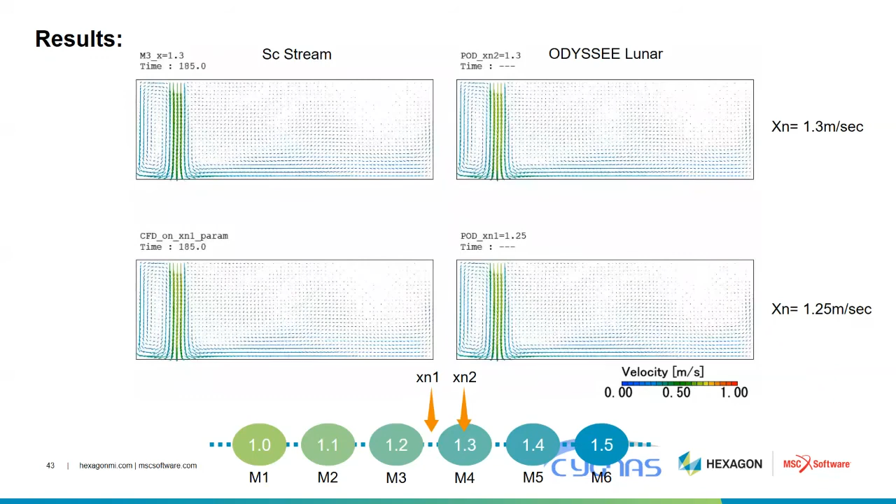This is the prediction using Lunar for the velocity profile along that cross section for 2 cases. You can see these are identical. You can't see any difference at all with the prediction. With a minimum of 6 use cases, you are getting a really good prediction. You don't have to do a number of more expensive CAE runs to get these kinds of parametric studies.

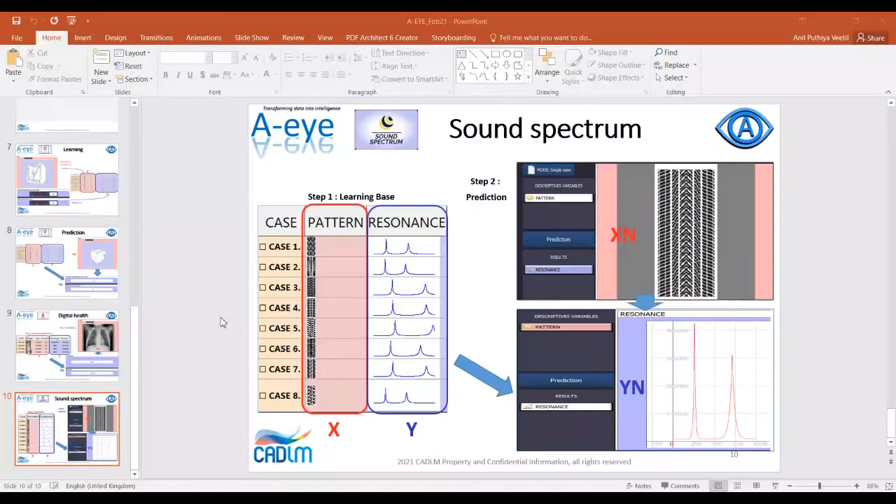When you consider the engineering aspect here, in this one we are feeding the images of different tire tread patterns. Sorry, can you see my screen now? Yeah, now we can see. So yeah, this is the example I was talking about.

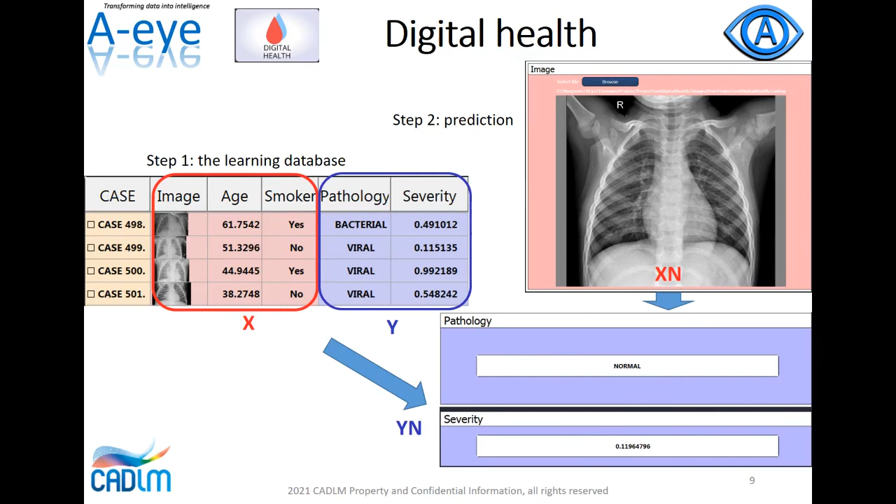The health industry vertical, like we are developing. The tool is called A-eye. It is a simple form of artificial intelligence. But we are using the image recognition capability, as I explained earlier. In this example, the engineering example, we are feeding...

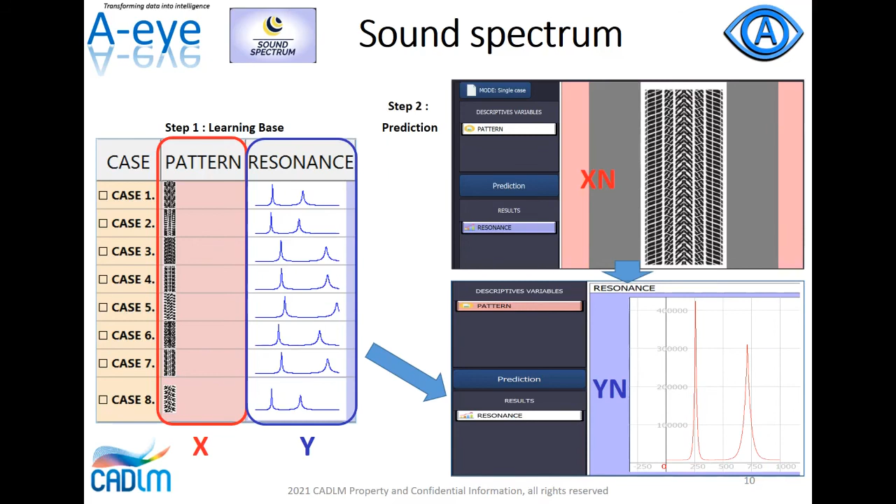So one question is: since all machine learning techniques are bounded within the data, how different is machine learning prediction from statistical modeling? And what coding language is used in the software? So I think for statistical modeling, the visualization you do is different. If you have many variables, which CADLM can handle, it becomes a bit easier to visualize. Is that correct? That's right.

Yes. If you see the theoretical background, we are using all these statistical methods behind our GUI. I won't be able to explain this background in detail, but Kambiz is the right person to answer that. Perfect. You can send us those questions in the email.

The last one: what coding language is used in the software? The coding is not Python, it's called Quasar. It's very similar to Python. And if you want to learn, there are training materials available for this Quasar language.